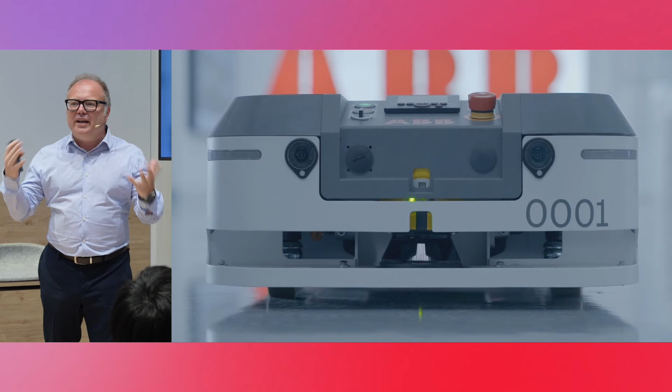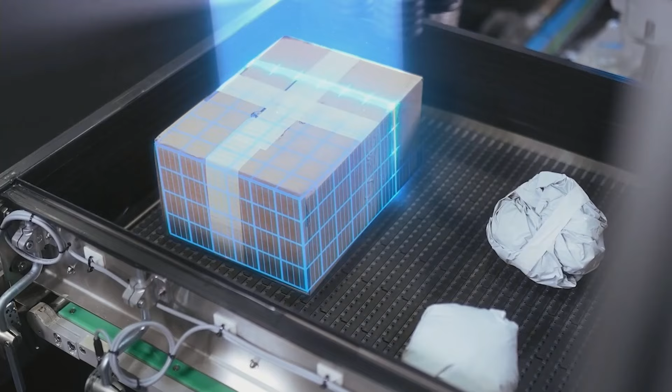In the last years, we've been giving eyes to the robots. You're going to see mobile robots. You're going to see robots that pick things. We have combined sensors with vision, but also force, like you have on our picker, where we are embedding the vacuum into the reinforcement learning we do to pick things. And everything of these features on its own is already available. You will see it in our booth, and you can actually enjoy it.

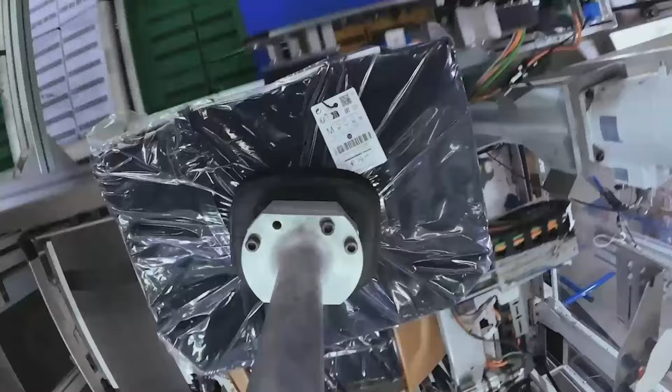But of course, now it's time to put these things together to converge in a more ambitious vision. At ABB, we have called this autonomy and versatility. And this is how we're going to, going forward, explain the building blocks that eventually, of course, can converge together.

Autonomy we define as the capability of a robot to perform one task in a changing environment without human intervention. So you can have a number of sets of autonomous function. Picking an object is an autonomous function, but that is not versatility. Versatility we define as the capability of a robot to change from one application to another task autonomously. Like, for example, I could do pin insertion at one point, and then autonomously I change to do painting or deburring.

So autonomy and versatility are very important. They are important depending on the case. And ultimately, you can combine them together to achieve robots that are truly autonomous and versatile.

Our next generation of robots are becoming like that. You will go from programming a robot to instruct a robot, to talk to a robot, of course using large language model, but also visual language models, so the robot interprets what you're asking, and they can self-program the set of instructions in rapid code and execute them.

But they will become autonomous in the sense that once they understand the task and the mission, they will adapt to the environment to really accomplish it. If the light changes condition, the product changes, and also they will not do it only at a local level in one robot. The fleet of robots will do it. And it's going to be a fleet that will combine mobile robots and fixed robots for the whole factory.

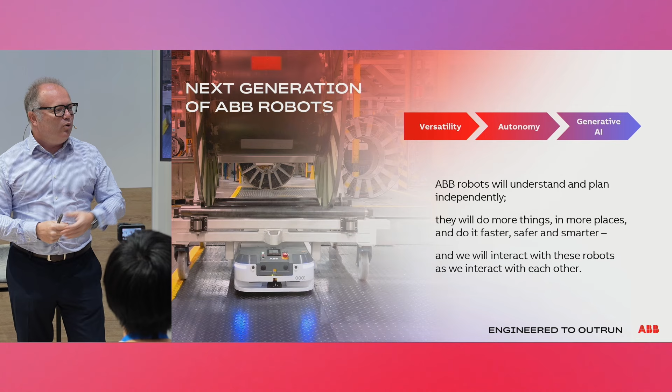Robots will become more ubiquitous. They will do more things in more places, leveraging all these new technologies. We call them autonomous and versatile robots. The big areas propelling this new era of robotics are advanced mobility, evolved dexterity, and enhanced understanding.

Let me talk about mobility. You know about our mobile robots. We are launching today a brand new one, the P603. Alfonso will talk about it. All our mobile robots have embedded intelligence, the most advanced simultaneous localization and mapping, visual SLAM.

So they navigate, they have stereo cameras, they capture the image in 3D, they process the image, and they can figure out the environment. They can map all this, and they can share the map across the fleet. All the robots are connected, when they dock to a server they continuously update what they see, but when they're on the field, they can navigate autonomously.

For example, if a robot has been given a mission to go through a path and that path is obstructed, the intelligence of the map will tell it there's another route around the corner to get to the same place. Not only that, the fleet manager knows there's going to be other traffic in that area, so it directs robots to places where there would be no traffic jams.

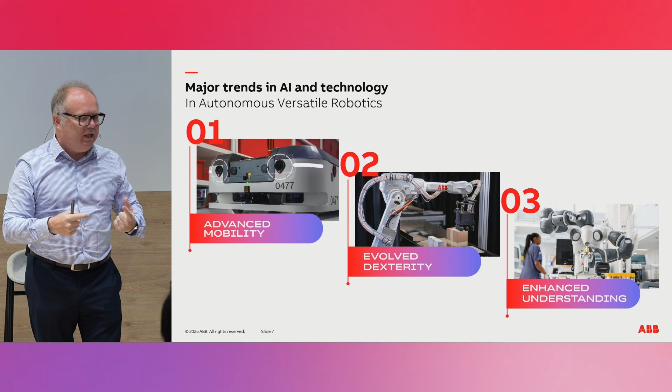Our mobility is engineered to outrun, meaning you've got this industrialization of mobility. You need to have the uptime, the safety, the redundancy, the service. All this great level of industrial mobility is what we are proposing with mobile robots.

That's one bucket of area, and already standalone it delivers endless possibility. We will be able to combine that with robot arms, because on the arm side we are evolving dexterity. We are evolving picking - you've got here the item picker, we'll talk about it later. But we are combining vision with collision-free path planning.

It's not only important to see the objects through AI, but once you know the environment, you need to go and pick it, and you need to do that autonomously. You cannot have a person saying there's an object here or someone has moved it. Now, you will see in RobotStudio - we had for a long time collision-free path planning - now that's live on integrated vision.

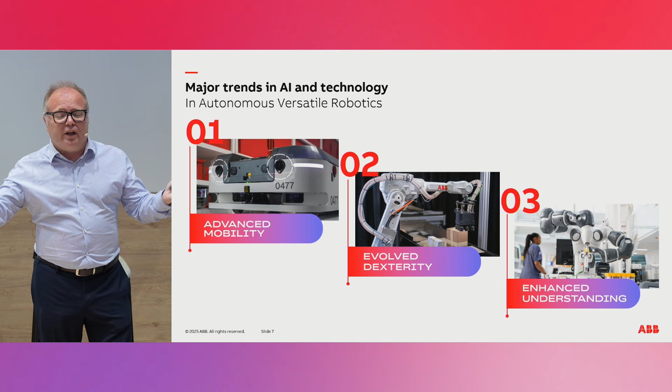Finally, we've got enhanced understanding. Here is really where generative AI is kicking in widely. Next week we're going to have a preview in China - you can use large language models to talk to the robot. The robot would take your words and translate that into a task sequence, a semantic sequence of tasks and logical conditions, and translate that into robot programming.

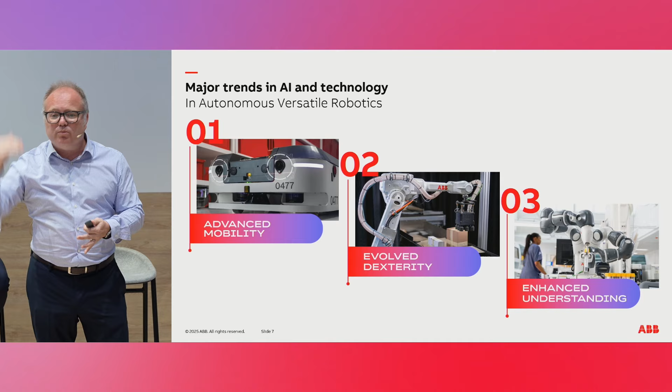So you will have autonomous generation of robot code from a language, from a video instruction, from a YouTube tutorial. Robots are learning this way, and that's not far in the future - we're already launching this later in the year.

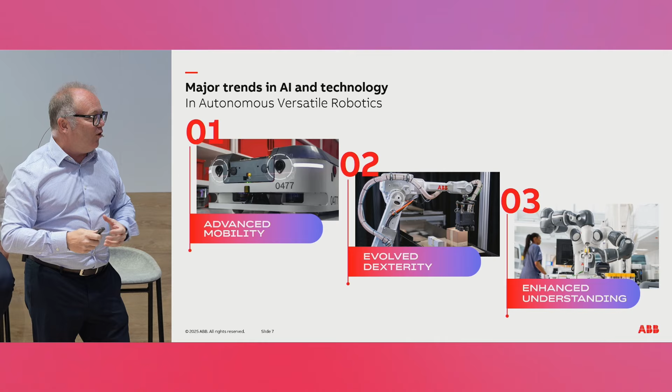So with these three buckets, individually they already create a lot of value. You combine them in different forms, you get this autonomous and versatility converging and expanding. They are built technologically in six blocks.

Robot-human interaction - I already alluded very much about LLMs and VLMs. Sensing and perception - of course if you want autonomy and versatility, robots more and more, it's indispensable, they need to have vision. But not only vision, they need to have force if you want to have really dexterous manipulation - pressure sensors, even tactile, very advanced sensors.

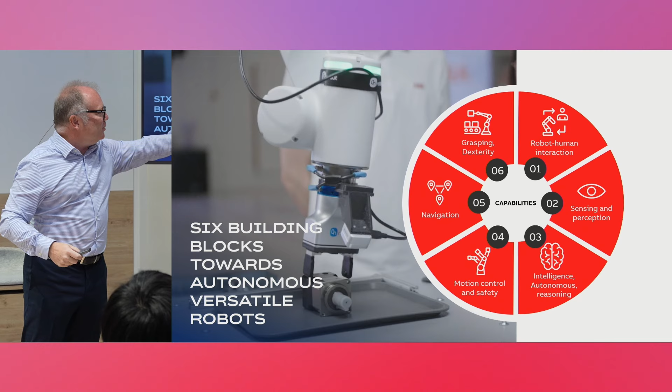You combine that, and you can train more and more complex AI models, not only having vision, but vision combined with force, and so on. So sensing and perception goes into intelligent and autonomous reasoning. I put the example of the AMR and the fleet manager - that will go for a number of things, where the robot will not only take your interaction in a dialogue.

But they will be able to plan and replan. And I insist, not only one robot, but the fleet of robots will become a team, and they will replan together. This enables going from this very constrained robotics world, where you had to arrange all the environment, put a lot of money to constrain the environment, to an open and unconstrained environment. That will lower the cost of integrating robots, enhance flexibility, and amplify the places where you can use robots.

But again, at ABB, at that high performance level, motion and control and safety is non-negotiable for us. Anything we do, we have the highest safety level, nowadays also cyber security with our OmniCore. Motion performance needs to stand there too, from accuracy, path accuracy, speed, acceleration, but also autonomous path programming and navigation - the robots are localizing and mapping. VSLAM is simultaneous localization and mapping.

So it gives you the map and where you are. But to go from A to B, that's navigation. And here there's a lot of intelligence to really make the robots go from A to B. And finally, grasping and dexterity, as we said, all these new skills to train the robots to manipulate objects. You've got this with the item picker, but there is much more coming.

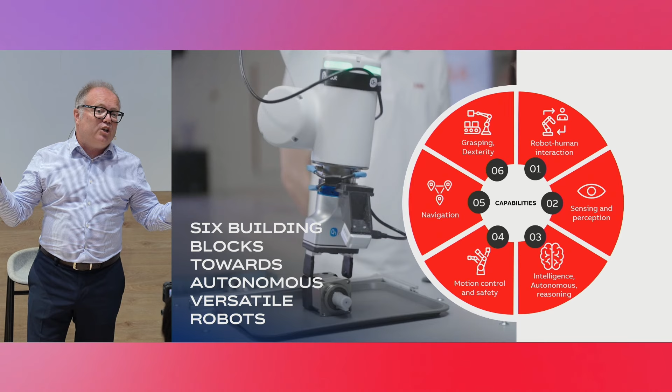What about tying your lace shoe? Then you will need probably to use end-to-end foundation models from AI to really train robots on these specific tasks.

Well, all this is now shown in our booth, in real, with existing products that we can buy. Of course, everything runs on OmniCore. That's the platform we have been working on that we launched last year that powers all this.

Across the different embodiments, we talked today about a lot of embodiments. We'll talk about all the mechatronic platforms we have. Everything runs in one controller platform, one software stack: OmniCore, RobotWare, RobotStudio, and things we're building around that.

And this is giving you the cybersecurity, it's giving you the energy efficiency, it's giving you the modularity, and it's giving you the compute power to embed AI like we're going to see in the booth. Because you're going to see this very important product, integrated vision.

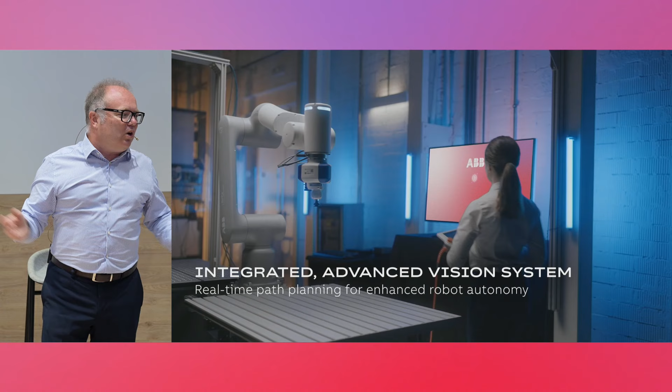How many years we've been talking about vision applications? And there are many vision applications, but still, we had always the same feedback: it's not easy enough, it's not easy enough. It takes too much expertise. It takes too much commissioning engineering time.

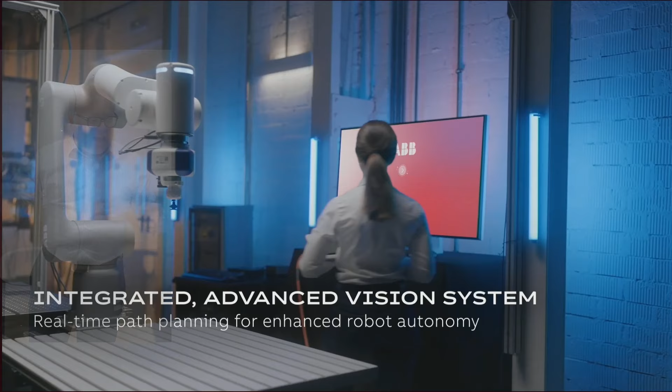Well, thanks to the work of the team, now we have a software option where we have a standardized interface in RobotStudio to any camera. You can have a 2D camera, a 3D camera from any brand working on an international standard. You can drag and drop the camera. You choose if it's a Photoneo, a Cognex, a MechMind, no matter what, just drop it.

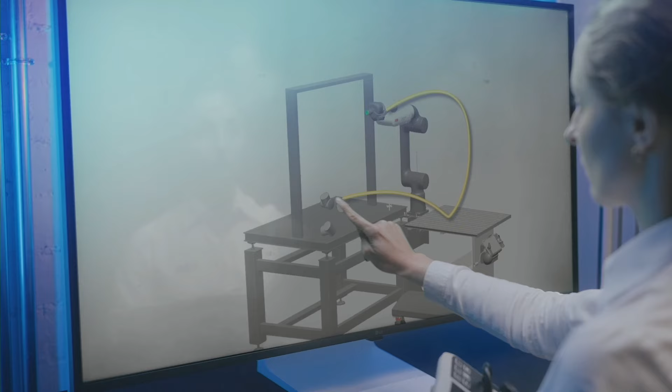You can then take the information from the camera. You can decide which algorithm you use. You could use an algorithm from the camera supplier, your own algorithm, a third-party algorithm, and you do your application. When you've done that application, you can crunch it in one word. It's a robot skill, a new vision robot skill.

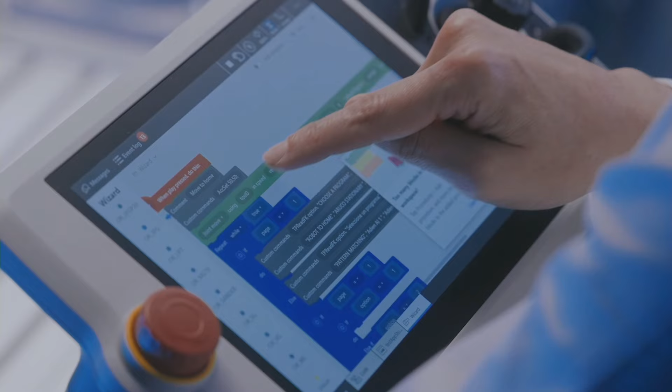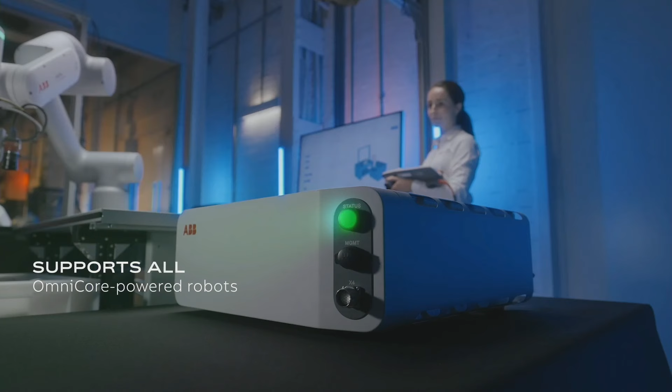So once again, when you have these words, you can apply large language models, because language models are about the richness of the words. We are creating here new words for vision that can be called out just like a word, with all this engineering behind it. So from that moment on, telling the robot find me the object, and find me and pick the object, becomes one click.

That you can see, and it's of course embedding this collision-free path planning. It's not only about seeing the object, it's about getting there. Like this, you can see the item picker, which is a combination of integrated vision and collision-free path planning in a warehouse e-commerce environment. Or you can see also those technologies on the Flexley Mover P603, 1,500 kilograms, omnidirectional AMR that's really suited for material handling of pallets and boxes.

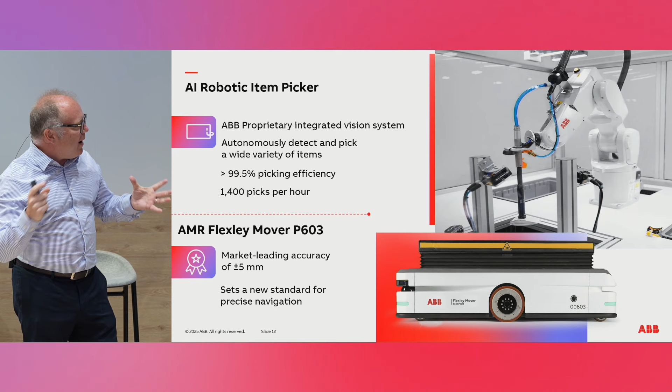It includes Visual SLAM, and it's connected to the brand new software power. Because you know, if something defines ABB Robotics, it's our incredible software platform, which we keep on growing. You all know about RobotWare, you all know about RobotStudio, now we're plugging in AMR Studio. So you've got really the robot cell view, and you've got the fleet view.

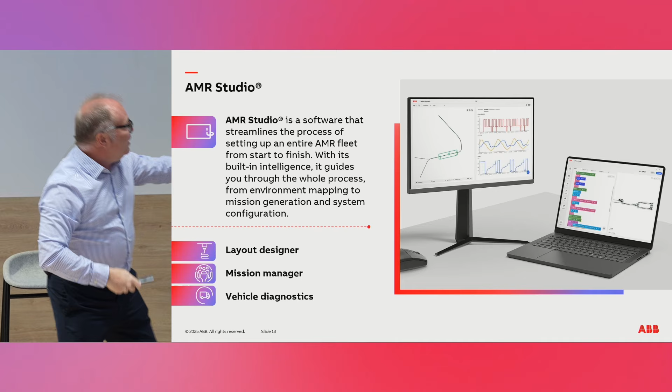Here you can design the layout, okay? You can decide the traffic rules, you can decide the tasks and the missions. So you're telling the fleet, I want to do this and that, with the drag and drop. No need for, in fact, there is no programming language, just drag and drop, and then it pushes out to the fleet. That is in AMR Studio, and of course, we continue to power RobotStudio.

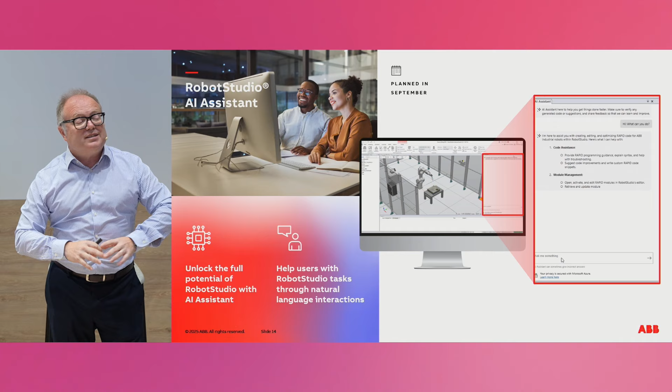There's a bunch of things coming out in RobotStudio. Last year, we showed you our offline programming for collision-free. Now it has moved from offline to online.

Now we're also using AI to help engineers improve efficiency, because we have trained a language model specific to our domain of robotics. So you have a copilot, a software assistant that you're prompting what you want, and it finishes the text with the semantics, the syntaxes, and the domain expertise of a robotics company.

Okay, all this is put together. Just think, we didn't start yesterday thinking about this. We decided some years ago mobility would be important.

We have expanded our mobile robotics. We have included the Visual SLAM. We're hardening it to industrial grade, engineered to outrun. We started many years ago with AI. The item picker you see here started with MIT in the US in 2017. But it was just last year that the big global brands like Inditex and DHL said, now you're 99% uptime, you're super fast, now we deploy it in hundreds.

So this is what it takes to bring things to industrial grade. Now we're putting all these things together because the autonomous and versatile robots are here, and that's going to be the next exciting chapter for ABB Robotics. Thanks a lot. See you soon.

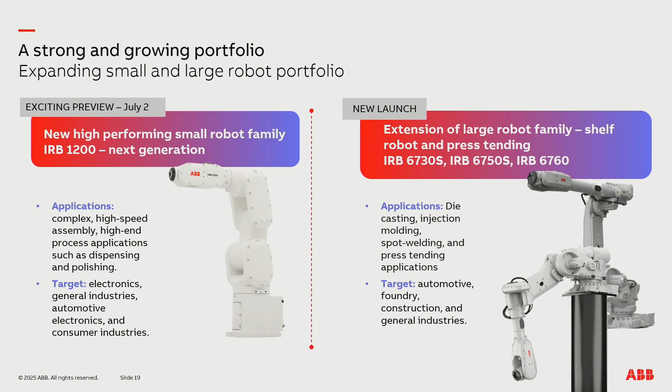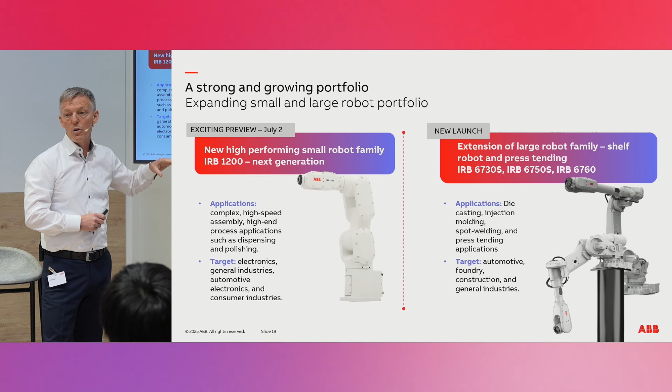I will come back to this fantastic launch, but before that, I want to give you a sneak preview of our brand new high-performing small robot family, IRB 1200, which is coming soon. We are supporting complex high-speed assembly with these robots, high-end process applications such as dispensing and polishing. It's particularly designed for the electronics industries and automotive electronics, but also with the higher payload, as you'll see in the video, for general industry and consumer industries.

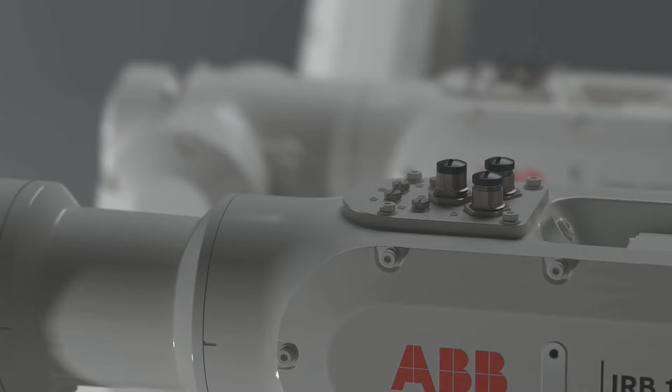So let me introduce to you the new small robot family with a short video. We are enhancing productivity and efficiency, and we are coming with 4 new high-performing variants, with payloads of 5, 7, 8, and 9 kilograms. With these leading class payloads, we are supporting applications like high-speed assembly with our best repeatability.

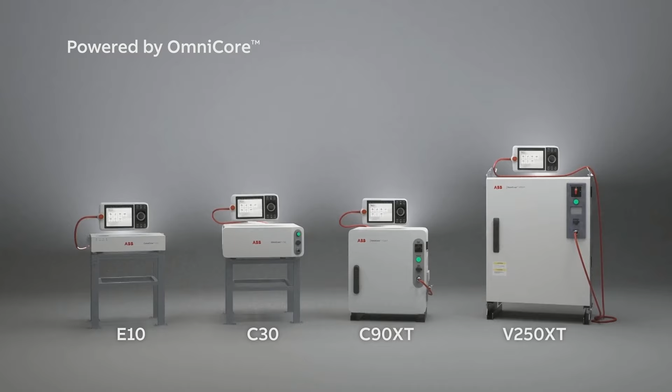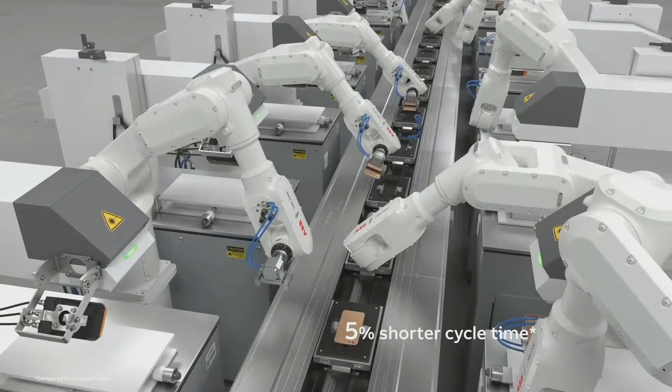And all these robots are powered by the OmniCore controller. We also believe we are ideal for high-end process applications, as you can see here, dispensing applications with great accuracy, and 5% shorter cycle time. We want to increase productivity with that, and we are supporting applications like surface finishing, polishing, and sanding.

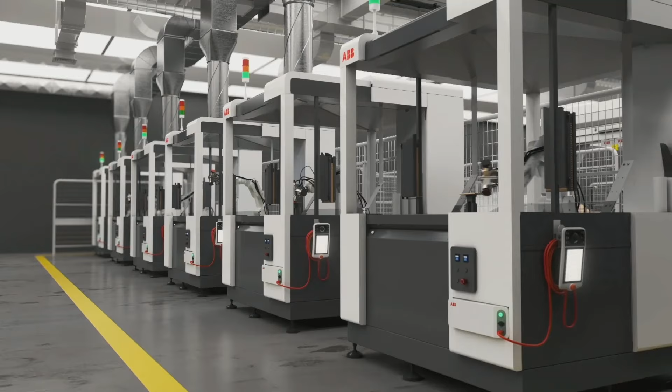Looking forward, one thing is clear: we are coming soon with a very high-performing robot family, supporting a wide range of applications, particularly for the electronics industries, with high-speed assembly and high-precision applications.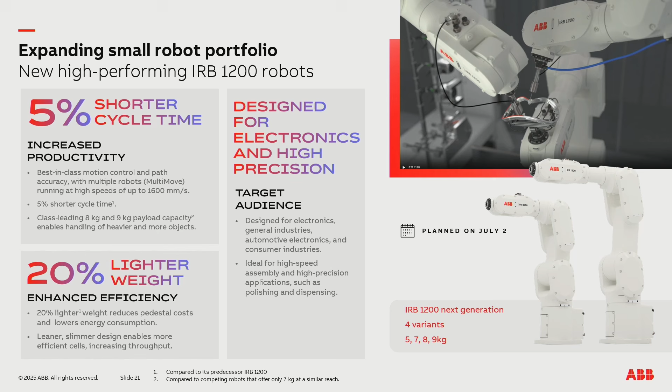Let me summarize the small robots, the values and the benefits. As I said, 5% shorter cycle time, coming with our high speed of 1,600 millimeters per second, based on best-in-class motion control and path accuracy. 20% lighter in weight, coming from a leaner and slimmer design. With that, we are reducing pedestal costs and lowering energy consumption in combination with the OmniCore controller, as Marc said.

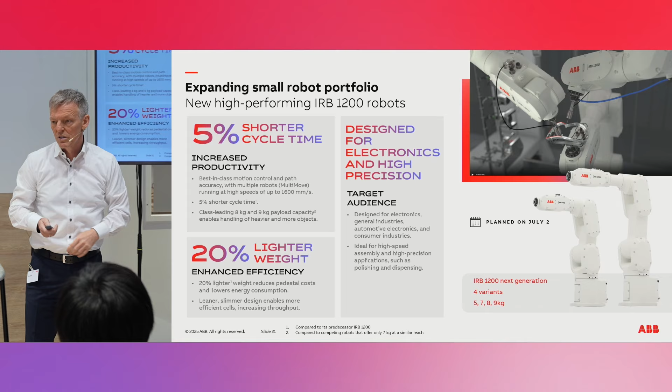Designed for the electronics industries, as I said, for high-speed assembly applications or high-precision applications such as polishing and dispensing, as you can see in this picture. Designed for the electronics industries and automotive electronics part, but with higher payloads, we also see a lot of opportunities for general industry and consumer industries.

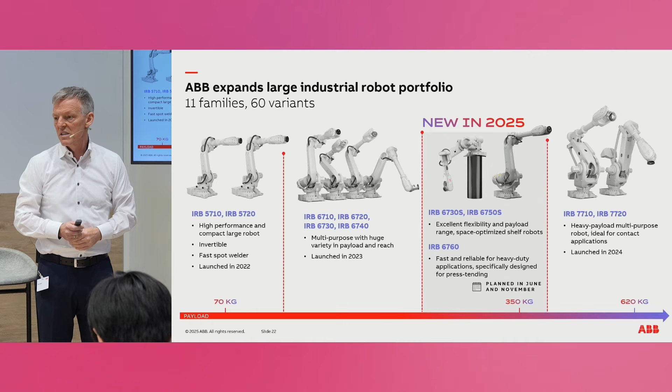Coming back to the launch, the expansion of our large robot family, we are coming with the 67 series, our new shelf robots, IRB 6730S and 6750S, and our press tending robots really designed for moving heavy-duty applications. Over time, we started this development in 2022, 2023, 2024, and now 2025. We now have 11 families supporting 60 variants in the market, one of the most comprehensive portfolios in the market for large robots, covering payloads from 70 kilograms up to 620.

Also here, let me introduce the shelf robots and the new press tending robots by a short video. For the shelf robots, we are coming with 12 new variants, up to 350 kilograms.

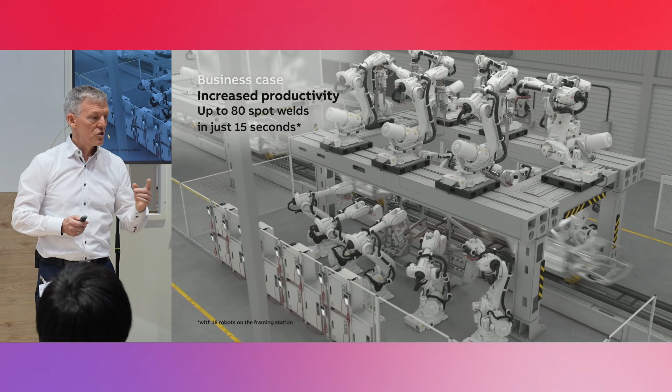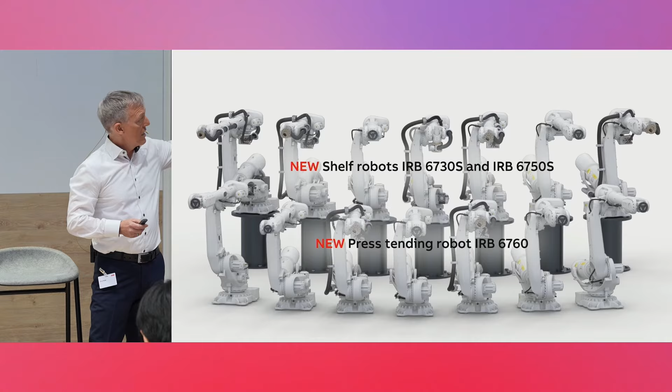For the shelf and press tending robots, we are coming with two variants, up to 200 kilogram payload. Let me start with the shelf robots. We are having best-in-class performance when it comes to payload, 350 kilogram, and we want to support applications in the spot welding area.

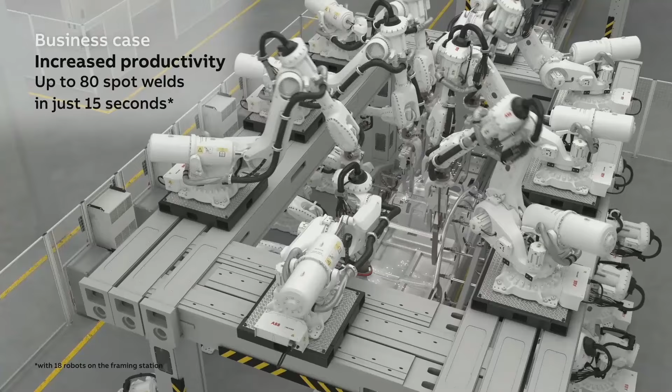Here you can see a framer in a body shop, 18 robots, and they are doing 80 spot welds in just 15 seconds, really increasing productivity.

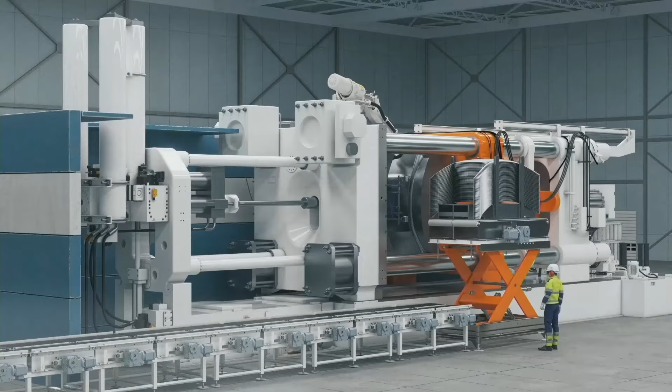Another area is handling and cutting in the construction business. Or we can use it in the mega or giga press area, using the robot for unloading the press, or using it for spraying the oil into the mold at the beginning of the press cycle.

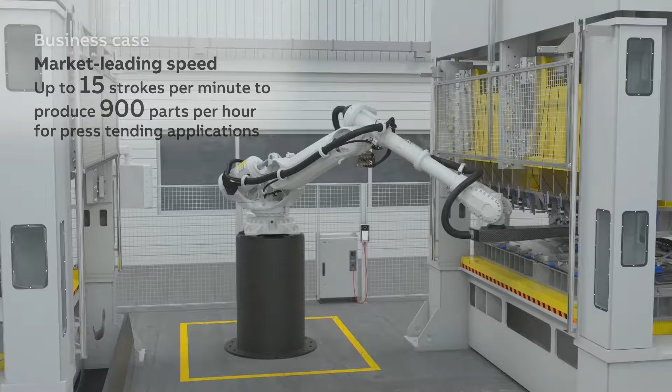And for the press tending robots, we wanted to develop a high-speed solution with these robots, and we did it: 15 strokes per minute between the presses. All the robots are also supported by our OmniCore controller.

And I just want to repeat, we are supporting a wide range of applications: 11 families, 60 variants in the market, one of the most comprehensive portfolios, I would say.

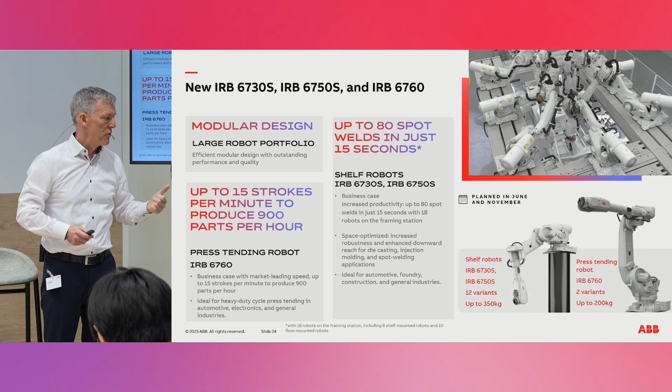Summarizing a little bit, first of all, the new robots have the modular design like all our large robots, and this really supports our performance and particularly our quality. And then for the press tending robots, as I said, we have a high-speed solution now.

With these robots, we are able to move heavy parts very fast, 15 strokes per minute. We are able to produce 900 parts per hour.

And for the shelf robots, we increased robustness and enhanced the downward reach, and that's why these robots are excellent for die casting, injection molding, and spot welding applications. We designed them for the automotive industry, but also for foundry, construction, and general industry.

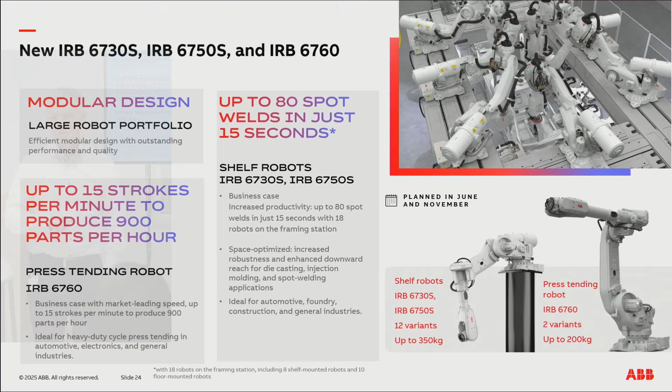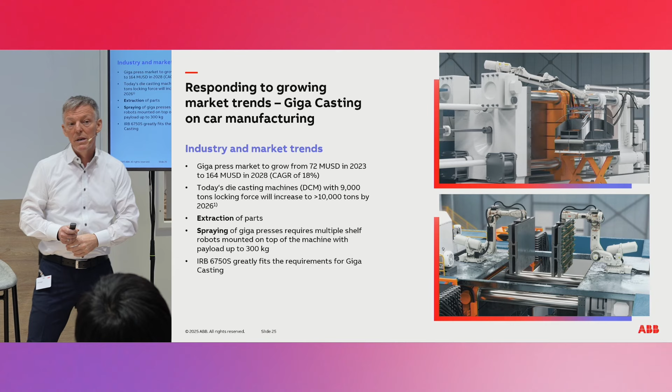We are also supporting a growing area, gigacasting. Tesla started this in the market, saying let's reduce the number of parts per car body and have bigger casting parts. It's a growing area: $72 million in 2023, and the estimation is that this market will be $164 million in 2028, an 18% growth.

As you have seen in the video, we are supporting it with two applications: one is the extraction of the parts from the press, putting the parts out. The other is using the robots to spray oil into the mold before the press cycle starts. Here is our 6750 shelf robot, a perfect fit for this mega trend we see in the market.

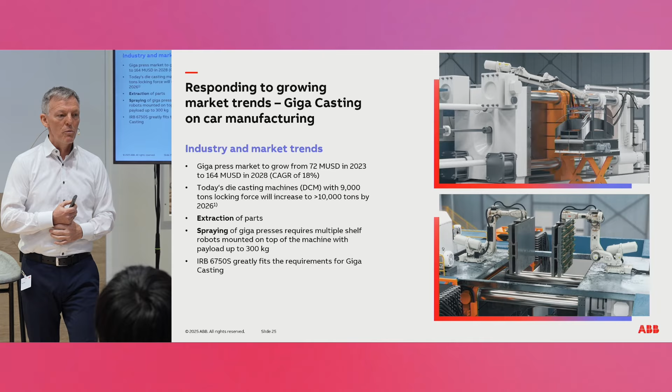And by that, I'm coming to an end here. I hope you enjoyed the presentation about the evolution of our portfolio in the last years. Thanks for your attention. I'm handing over to Alfonso.

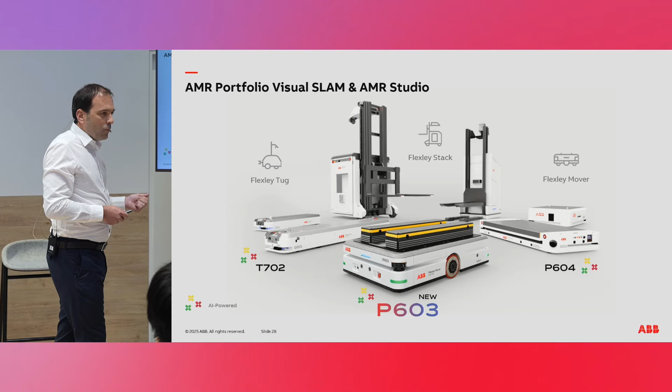Our robots also have a very easy-to-use software tool for commissioning, AMR Studio. It saves 20% of time in commissioning, and it doesn't need specific competencies in programming or coding. So by adding hardware, AI, and easy-to-use software, our robots are faster, safer, and smarter.

So let me go to the market. What is the market requesting from us? First, more AMRs. The market is requesting more AMRs. It is expected that by 2030, 14.4 billion will be the volume of the AMR market.

Second, inside the AMR market, the demand is for more platform AMRs. Inside the AMR types, the market is requesting more platform AMRs.

Third, flexible automation. Companies are struggling to predict demand, and therefore they need flexible manufacturing processes. AMRs are key for that because with their navigation, they can easily adapt to material flow changes or changes in the environment.

Fourth, better return on investment. In the end, companies invest in robots because they want a return on investment. What are they demanding? Faster commissioning, so that implementation of an AMR project does not affect production or has minimal impact, and fleet management and interoperability, so that different AMR types can work together in the same space.

So we have taken all those demands from the market, and ABB's answer to that is the P603, Flexley Mover.

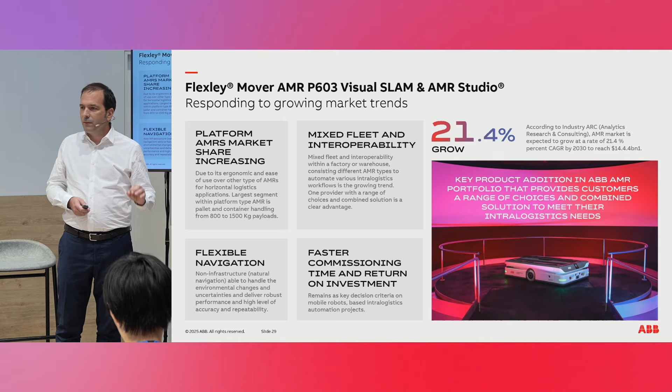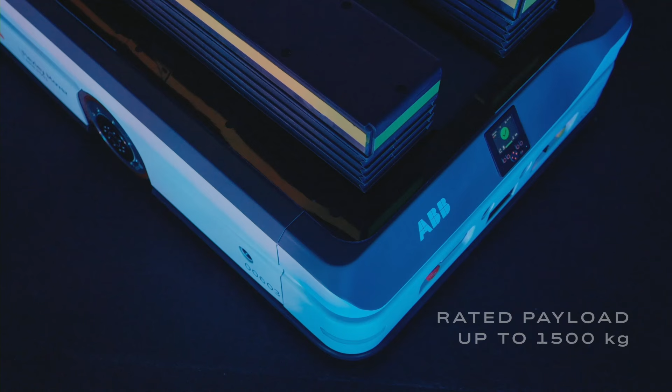You will see it in the video. So it's prepared for 1.5 tons. It has a compact design that allows our customers to save space in their stations.

It moves with our visual SLAM technology navigation, and it does it smoothly thanks to our innovative suspension system. They are better prepared for load management.

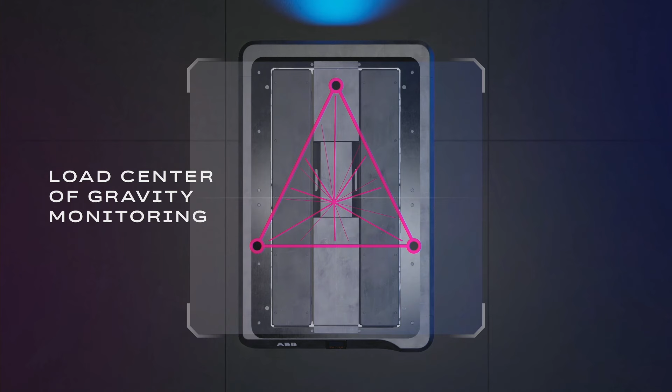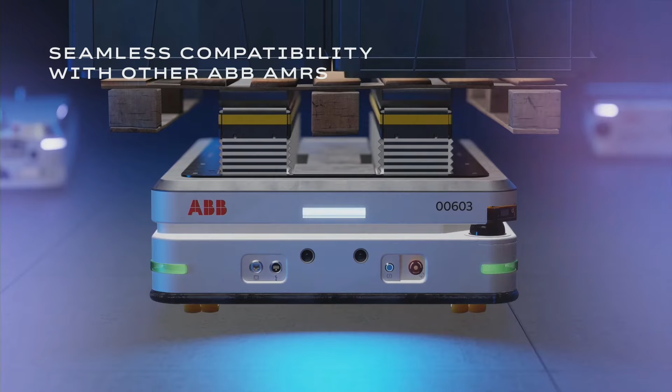We have a load center of gravity monitoring system that allows the AMR to regulate the speed depending on the balance of the load. It has an easy-to-use add-on that allows different top modules, making it easy to move racks, containers, pallets, all types of different loads.

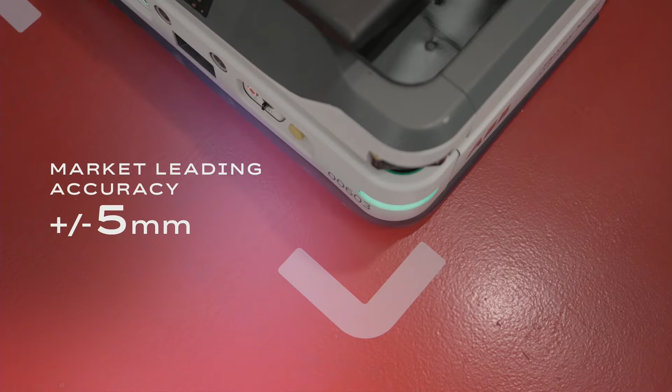It has seamless interoperability with other AMRs from ABB, and it does it with great precision of 5 millimeters.

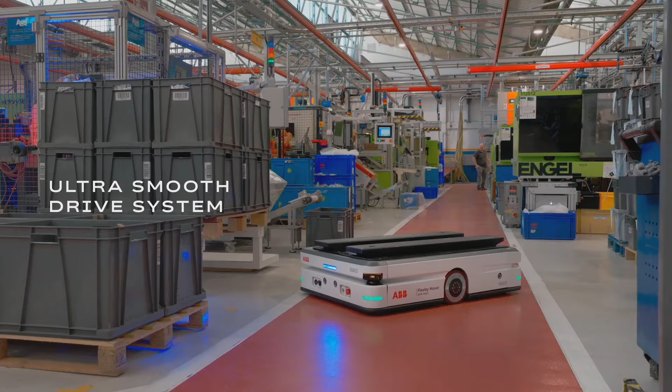Of course, that precision doesn't mean that it's slow. It's very fast, it goes 2 meters per second. It's 10% faster than similar AMRs with different technologies.

And it does it in a very safe way. We are complying with the most demanding standards regarding safety, so it's a good machine to work with human beings.

So if you allow me to summarize the benefits: the P603 is faster, 10% faster than similar vehicles with other technologies, thanks to AI-based visual SLAM technology.

It is safer. We are fulfilling all the most demanding safety standards, and at the same time we are adding the center of gravity monitoring system.

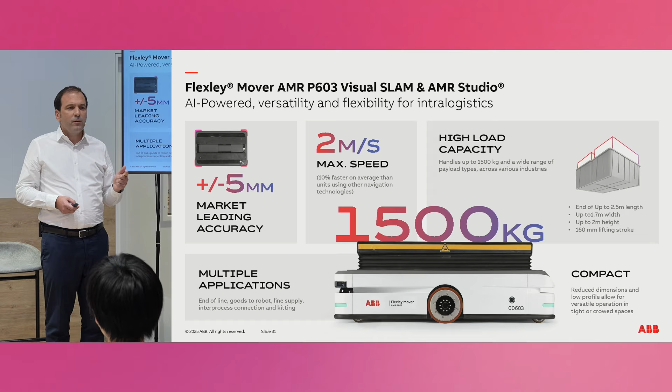Third, it's smarter. On one hand, AI-based localization allows us to have 5 millimeters of precision, and secondly, easy-to-use software to reduce 20% of commissioning time.

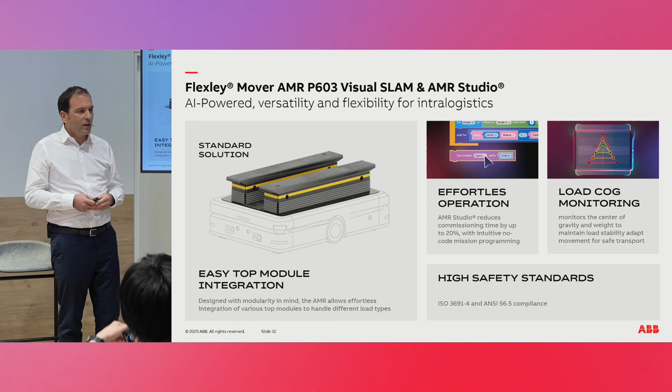And of course, it's versatile. Our approach that allows integrators to put different hardware on top of the AMR makes it quite flexible, and it's very easy to integrate both from the mechanical and from the software point of view.

So we are continuously delivering our promise of versatile mobile robotics, and we will focus on blending precision hardware with AI and software to push even further versatility, flexibility, and autonomy. Thank you so much.